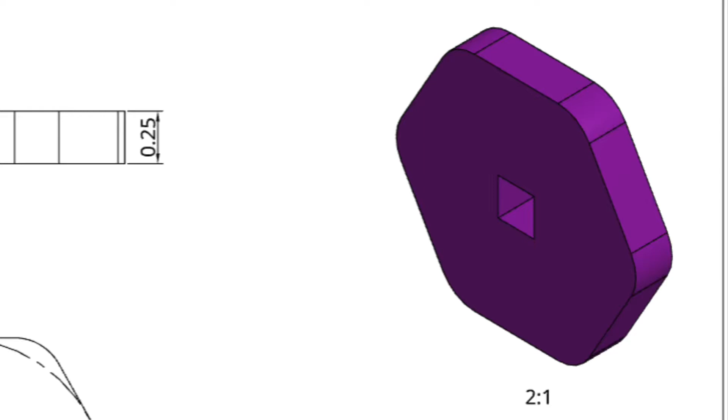With the Polygon Cam, new document. I'm going to call this the Hexagon Cam.

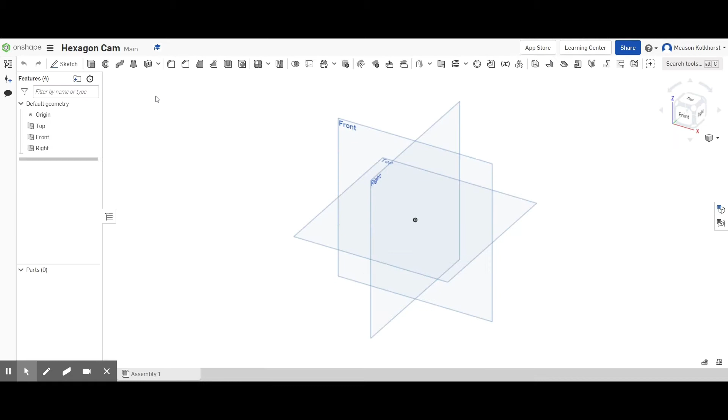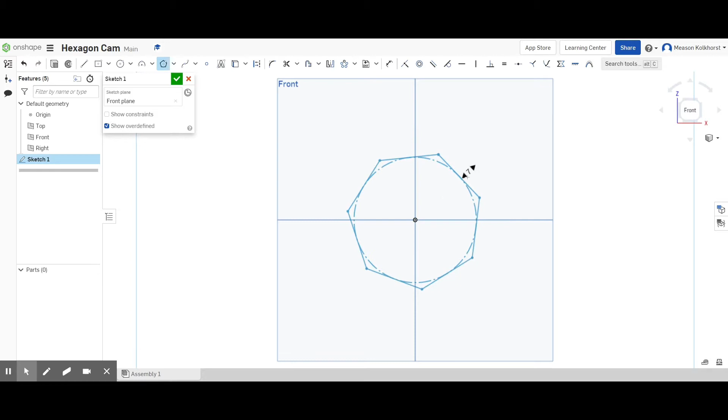We're going to start our sketch on the front plane. I'm going to use the inscribed polygon, start in the center here, and draw it out. It's 6-sided, so I'll leave that. I don't want to move it bigger or smaller, leave it at 6. That's great.

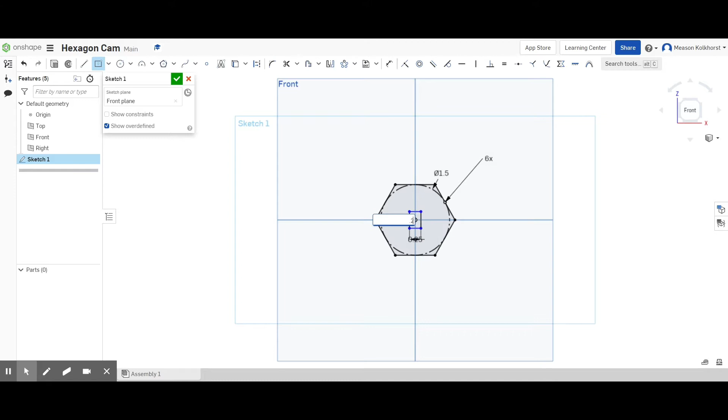I'm going to dimension this inner circle, and it needs to be 1.5 inches. Then I'm going to use the horizontal tool and choose one side to make it horizontal. I need to come back in and put my center point rectangle right in the center, 0.25 inch, 0.25 inch. And there's my starting polygon cam.

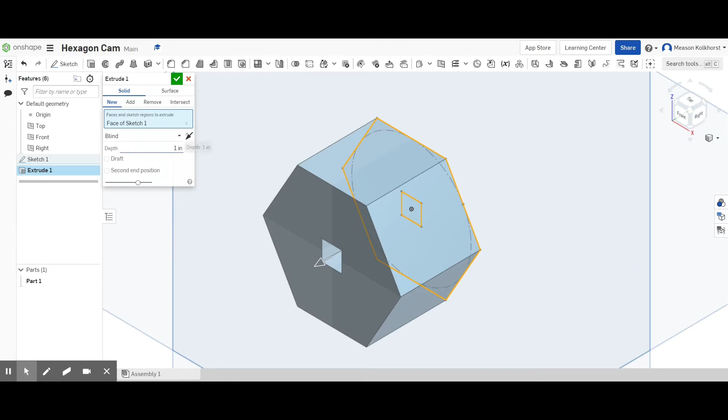Green check mark, I'm going to extrude. Come over here and extrude everything except for that center square. Change it to isometric so I can see what I'm doing. And yes, I need to change the dimension to 0.25. Green check mark.

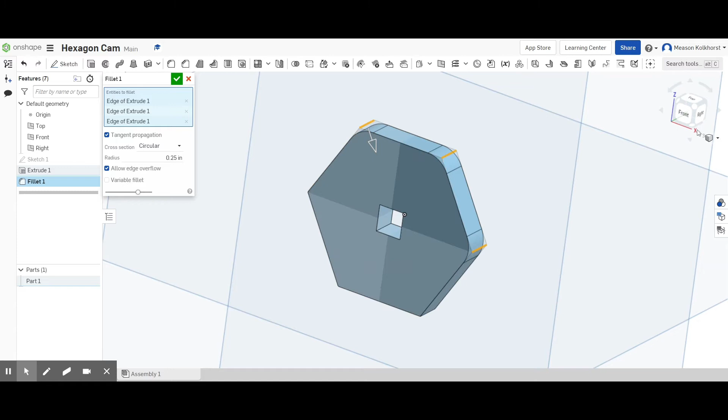But that's not all, this one gets a little more complicated. We're going to have to put a fillet all the way around. That fillet diameter radius is going to be 0.25, and I'm going to choose each of the corners all the way around. I have to keep spinning it to get all 6 sides. Zoom in, take a look at it. Green check mark, and yes, I think that looks like it's supposed to look.

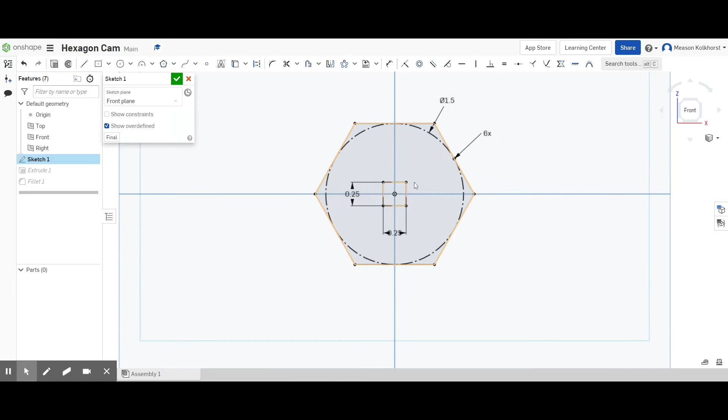So, 2 pictures. The first one is going to be your sketch showing me all your dimensions. Wow, that guy's really far out there. I'm going to pull this back down so I can zoom in so Mr. K can see everything. Take that screenshot, green check mark, tip it isometric, and take that screenshot. And that will earn you a C.

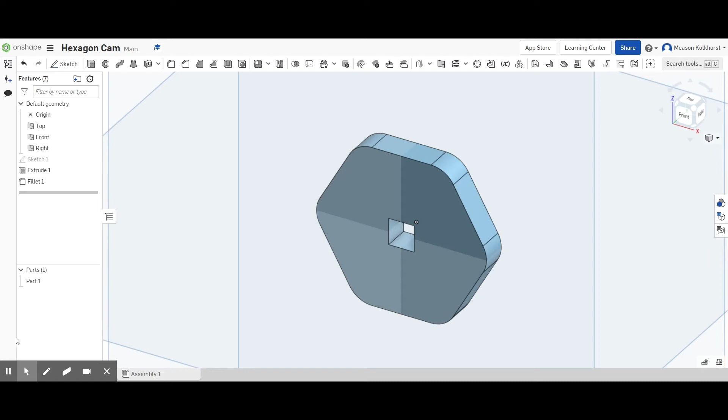Well, I get in such a hurry on these things that I totally forget to change the color. I know y'all do too, but that's part of the grade. Don't forget to change the color. I'm going to make this one purple, that's a good color for it. Green check mark.

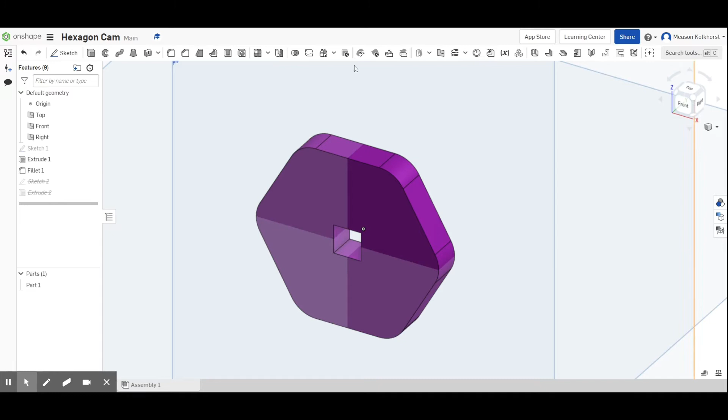Okay, if you're wanting a grade better than a C, you're going to have to come up with some kind of design for this face. Start a new sketch on this front face extrusion. I think this time I'm probably going to do a triangle. So I want to make sure I get a triangle. Yeah, I'm okay with that.

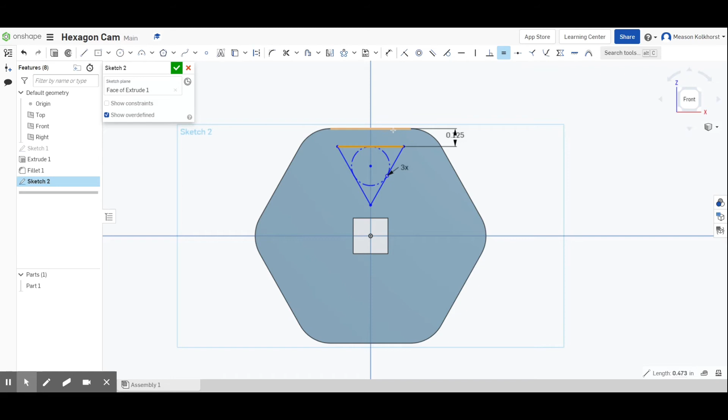Take this guy, make him horizontal. I'm going to take my dimensions and make sure I've got it dimensioned pretty good. Actually, I'm going to dimension from here to the outside, and I want that to be 1/8 of an inch, 0.125. You can also do that by saying 1 divided by 8, which is also 0.125, it's the same thing. I also want the length of this line to be the same as that line, so I'm going to choose my equal sign and make them equal.

And I don't like this down here. I think I need to make a circle to go around this so I can block everything out, 0.5. And then I might come in and trim this part here. Trim, how's that look? You know what, I like that. I think it looks pretty good.

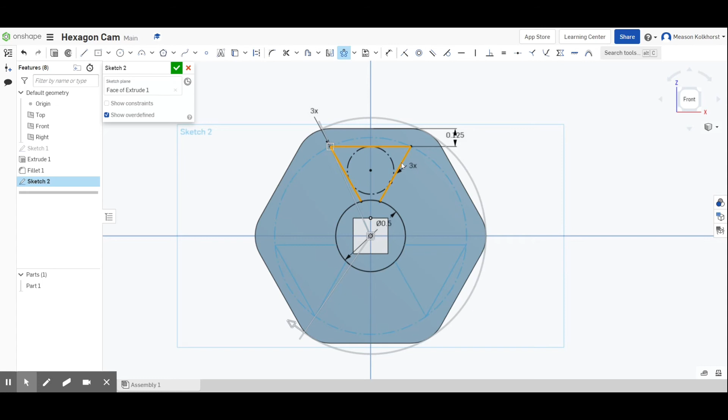So now here we go, circular pattern. 1, 2, 3. You know what, I like this. It's starting to look like a nuclear warning sign here. So I'm going to green check mark.

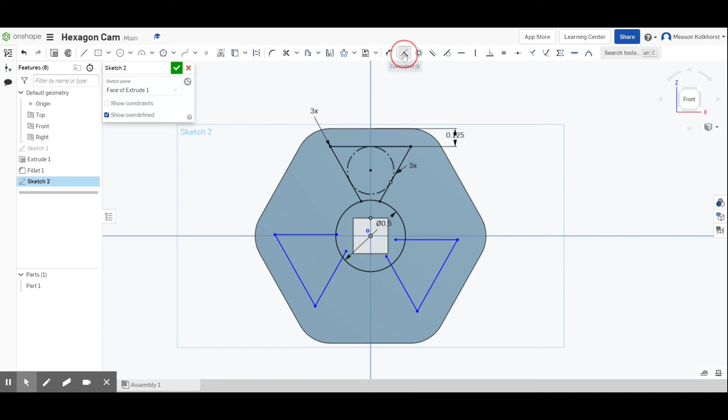Remember, this center point—oops, that's not what I want. If I start moving these guys, that center point comes off. So I want to make sure that I come over here and coincident this one and that one and that one. Why? There we go, there it is, I just wasn't clicking right. So there's my 3 pieces, I think that's kind of cool.

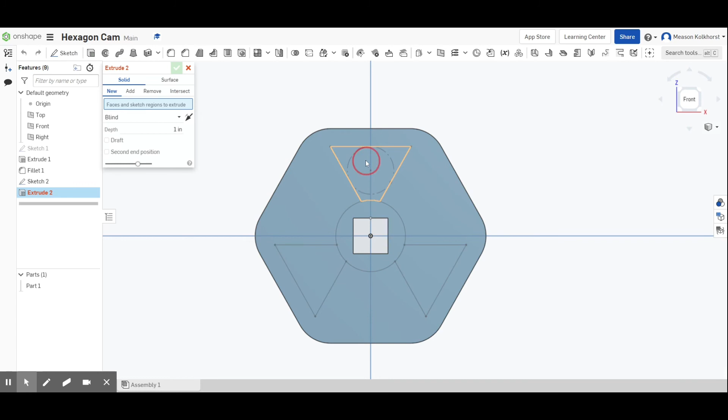Green check mark, I'm going to extrude. 1, 2, 3, remove. See how that looks isometrically. Yeah, I'm liking that, I like that a lot. But remember, you need to be you, you need to have yours. If you're just copying me, you might get a little bit better grade than a C, but it's not going to be a lot better than a C.

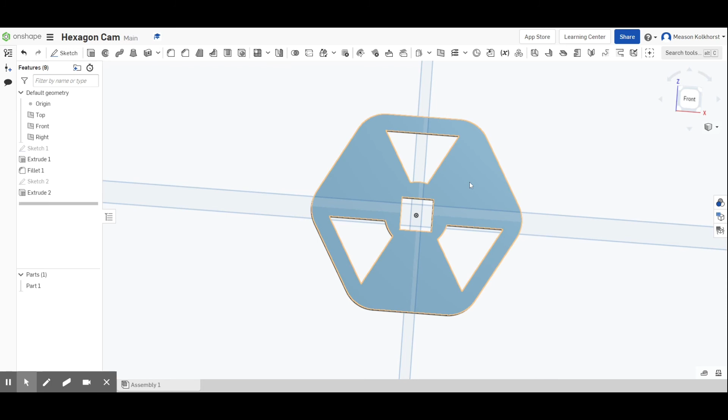So if you're wanting that A, you're going to have to be creative on your own, coming up with your own design. I got some room, I could probably put something in here if I wanted to. It's got a little bit of creativity, I got a little bit of room for creativity.

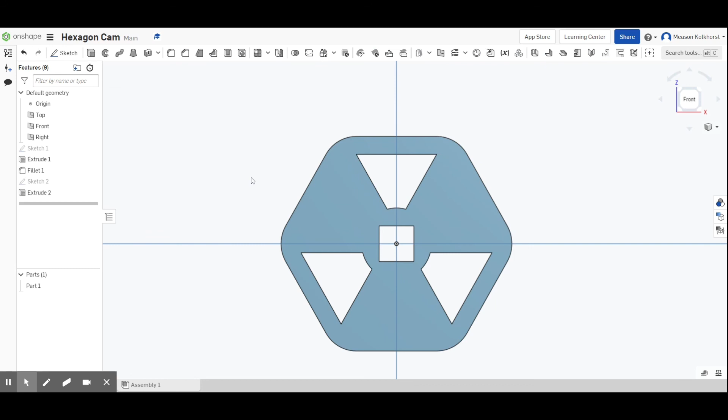So remember, when you're taking your pictures to turn this in, you have your 2 pictures from before, and you're going to take a picture of the sketch so I can see what's going on there. Screenshot of that, green check mark, and change it back to isometric, zoom in on it, and a screenshot of that. So you should have 4 pictures that you turn in. Good luck.

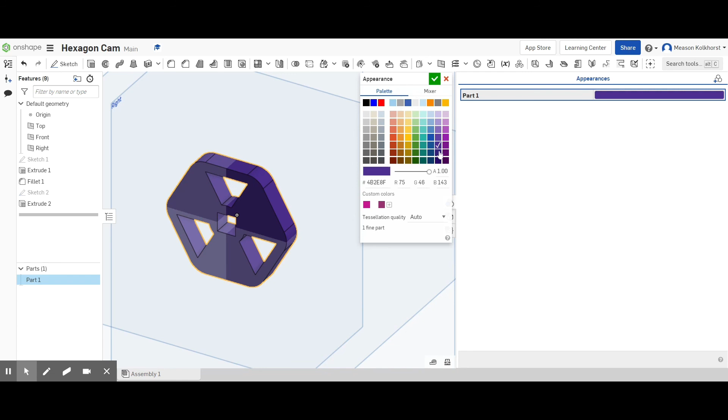And yeah, I know I forgot to change the color at the beginning right when I finished the front piece, but at least I remembered. Make sure you change the color, and instead of blue, just to make sure you're seeing that I'm changing the color, I'm going to change it to that purple, just because.

Again, it's totally up to you, you can do whatever you want. Just make sure you get the right pieces, the right colors, to make yourself happy. And that's what you're going to turn in. Make sure you turn it in with color. Good luck.